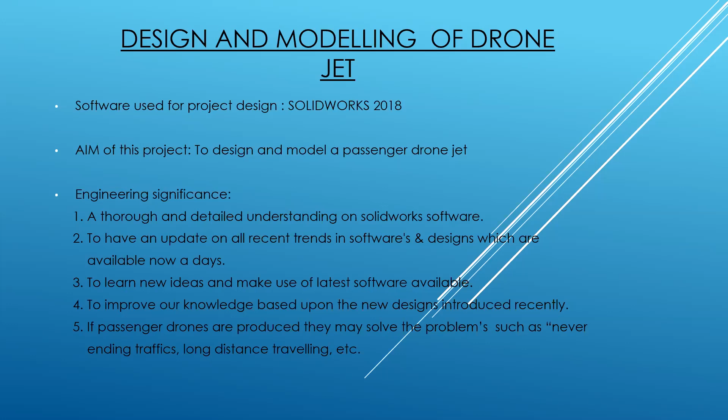Next, I took reference from Lilium company, and I've given a link here. Lilium is developing a revolutionary on-demand air taxi.

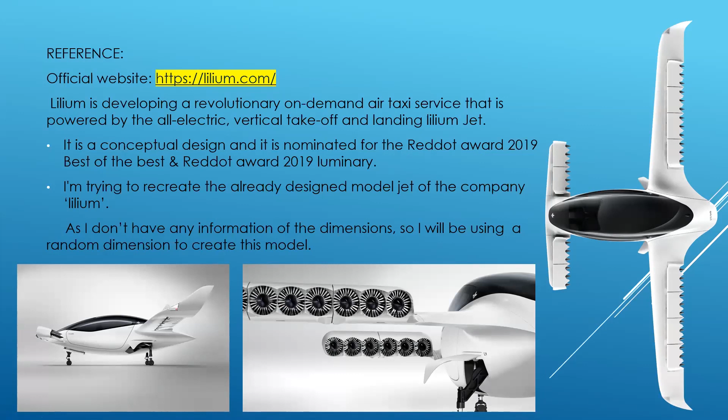We have problems anywhere in the world, like traffic on roads. So this company has introduced the idea of flying from one place to another, but it's a full electric vehicle, and this company has also received some awards like the Red Dot Award.

Introduction: it's an all-electric aircraft. Unlike a normal aircraft which has a single jet engine turbine, this one has 36 engines mounted on its flaps. So it can take a vertical takeoff, and during mid-transition it can also move forward.

It has ultra redundancy with 36 independent engines and a triple redundant flight control computer. Each engine is independent and controls itself, so if a failure happens to one engine, all the other engines can take over, making it safe.

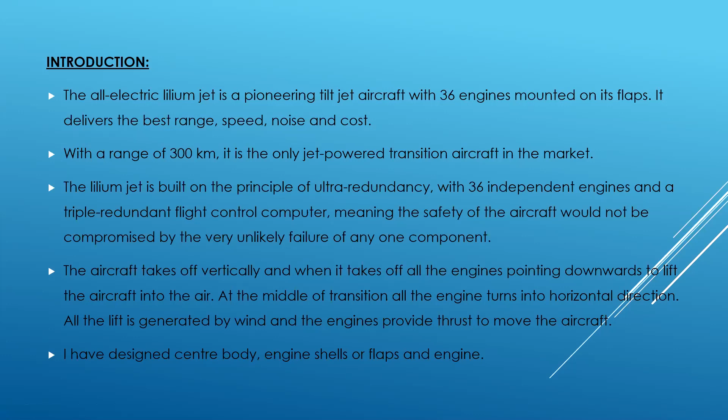So first I started the approach by making the drone center body. I started this as a surface option, creating an oval, eye-shaped profile, then closing all those using a loft.

After the loft, I tried to make curves in the shape of all the curves, because I thought I shouldn't see any sharp edges.

So I tried this, then added the wings also using loft. The front loft was much easier, but at the back of the wing I had to shape it differently, so I used lofted surfaces with guide curves, which made it much easier.

For this part here, I used surface modeling to cut this profile and build inside a bulb-like shape. After that I used the split curve option, split lines or split curves, to get the doors, exiting seats, or landing gears, etc.

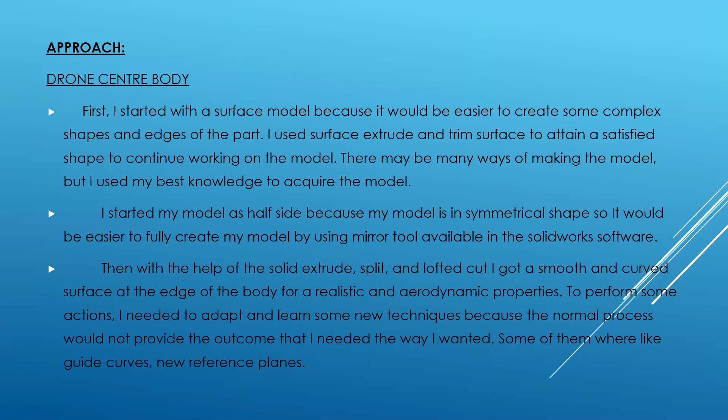I used solid extrude, split, and lofted cut mostly, and because of that I achieved these curvatures.

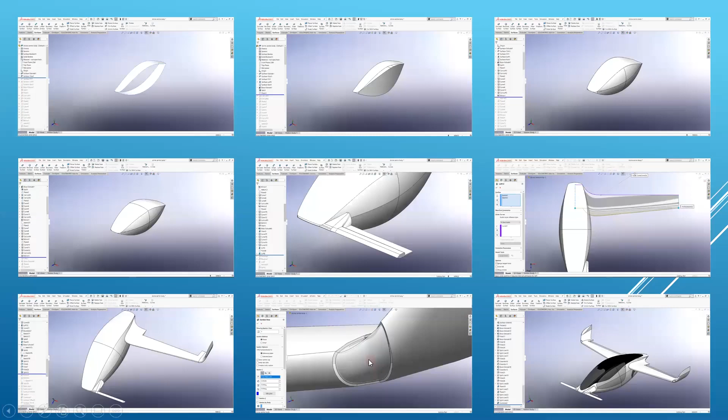Then after finishing my center body, I started doing the flaps used here. Flaps means you can change the direction of the flaps according to which direction you want to go in flight.

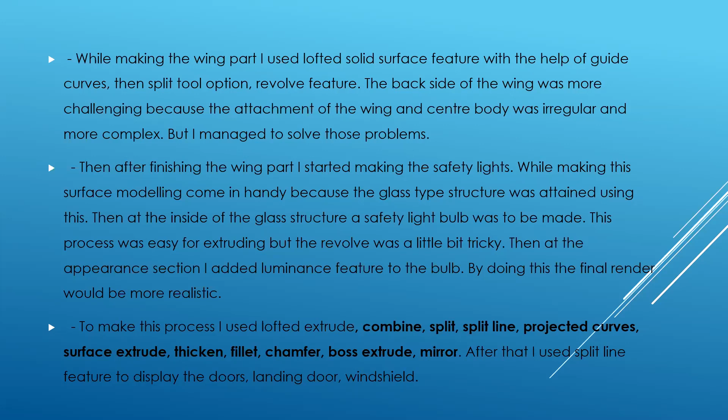After finishing the wing, I started making the flaps, like the cover for the engines, which fit onto the wings. Using surface modeling was a better idea, so I combined splits, defined projected curves, and similar techniques.

The engine shell cover is basically used to fix the propeller engines to the body of the jet engine, which is why the engine covers are used.

At the front of the jet airplane there are engine slots: six on the left and six on the right in the front, and in the back side of the wings, 12 on each side. So actually we have 36 engines all over the jet.

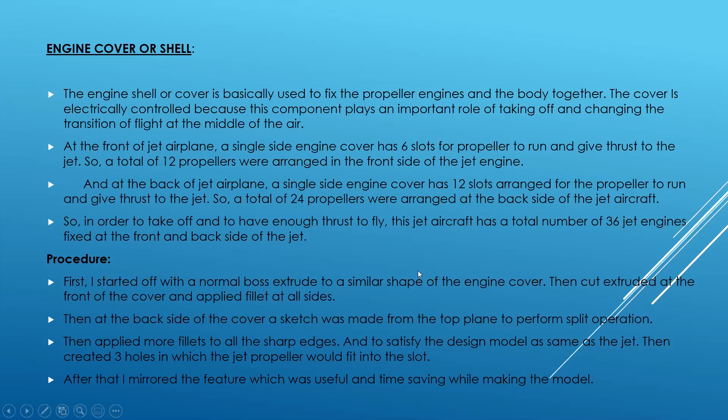The procedure: I first started with a normal boss extrude in a similar shape, then started cutting it in this curved shape for more aerodynamics.

Then I started making holes. I made a single hole and used the linear pattern option to create multiple holes.

Then at the back side, I reduced the weight by cutting it in this shape and dimension, so it would be both more modern and realistic.

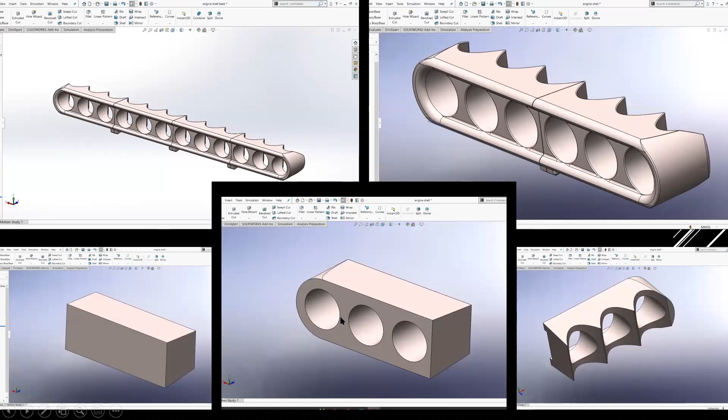All the dimensions used here are based on my own ideas, not standard ones. The inner diameter of the slot is 200 mm, which provides the power to lift the full aircraft. So then I started making the engines, the single engine.

First I made the tail, then the center body, and the dome option. Then I used the revolve boss base to make the cover for the blades, and built the blades themselves.

I made these blades by changing the sketch using loft, building different planes - one at the edge of the cover and one at the edge of this body. So I used a lofted extrude with the two sketches and was able to obtain these shapes.

Then, the engine has a capacity of carrying 4 to 5 passengers, so that six engines can give much power to lift the body as well as the passengers.

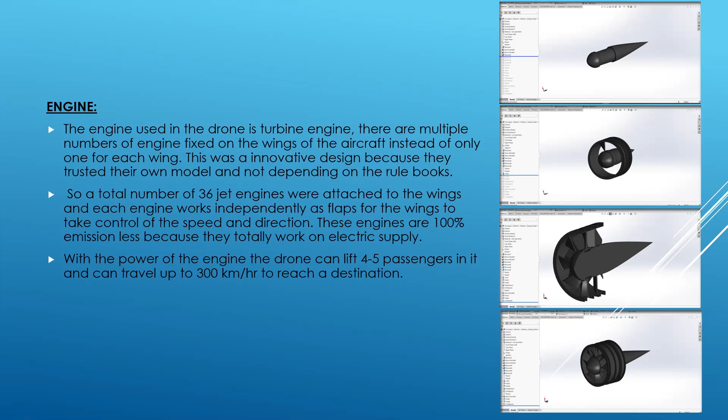So that's all. I started and finished all the parts.

Combining the other options, then I moved on to the assembly parts. The parts were totally 3 parts, but during assembly it took like 41 parts to assemble.

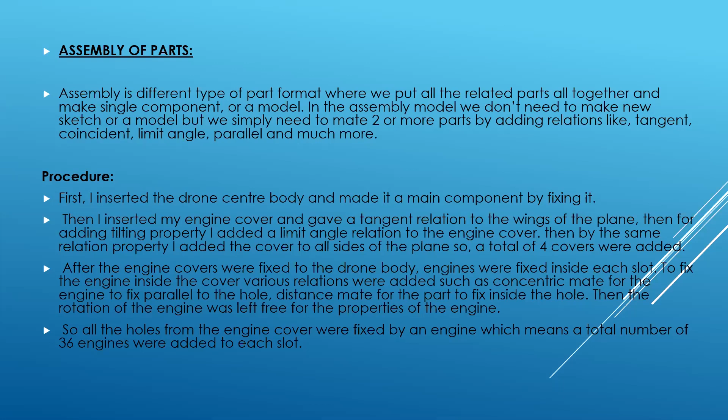Procedure: first I inserted the drone's center body. This is its center body. Then after that, I used small bars to attach the cover shells to each other.

After attaching the engine covers, I inputted more engines to each slot and gave them concentric and coincident relations so they fully attach, but still rotate like a normal engine should.

Then, after fully assembling, this is the full view.

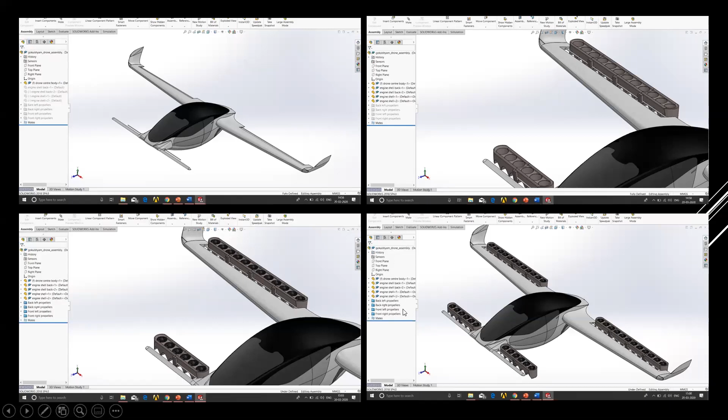The assembly tree shown on the left was so big, so I added some folders so it would be fully understandable, like the back left propellers. So with all the combine options, these are the views of the assembled parts.

This is the right side view, the top view where we can see from the top, and this is the front view. This is the angle where the jet engine takes off, and this is the angle where it moves forward.

So the covers can be changed 90 degrees from the front position to the normal vertical takeoff jet engine position, like those.

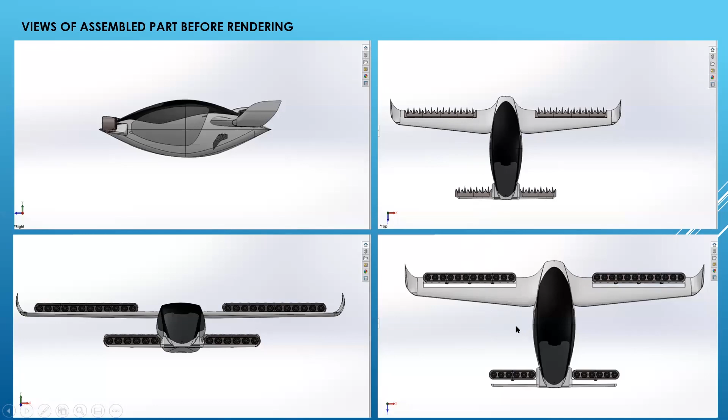Then after finishing the assembly, I started doing the rendering of the drone jet.

I used the SolidWorks Visualize software to do the rendering. Rendering is an option where we can convert our assembled parts into a photorealistic view, making it much more realistic than what we constructed in the software.

So, the procedure: first we have to open the SolidWorks software, then import the assembled parts.

In the Visualize option we can only convert the part as a photo, so we cannot change the views there like side view or right view - we have to render separately for each part.

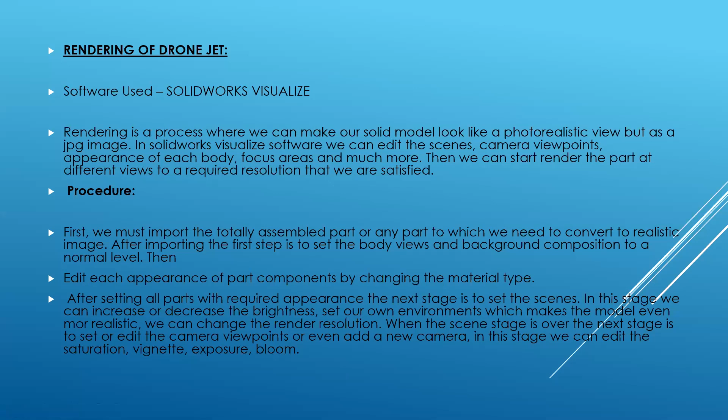In the Visualize option we can edit the appearance. We can also edit the appearance in the SolidWorks option, but for getting a realistic view we can also do the appearance here.

So for the top view I used black like the original Lilium jet option, and I changed the covers to a little darker color, like the cover doors and the landing gears.

After that we can also edit the background, choosing what background images we want to see, and we can add lights too.

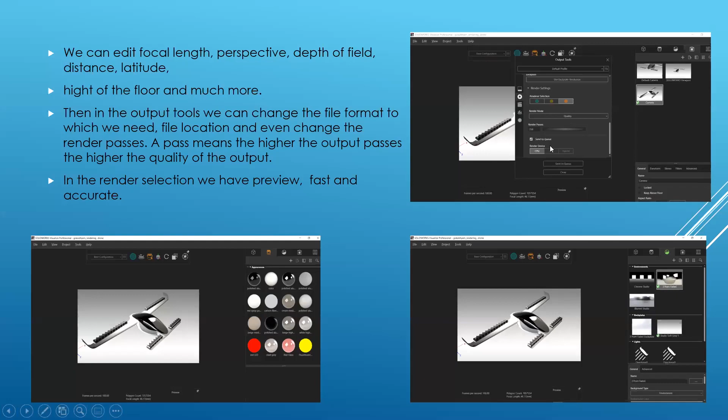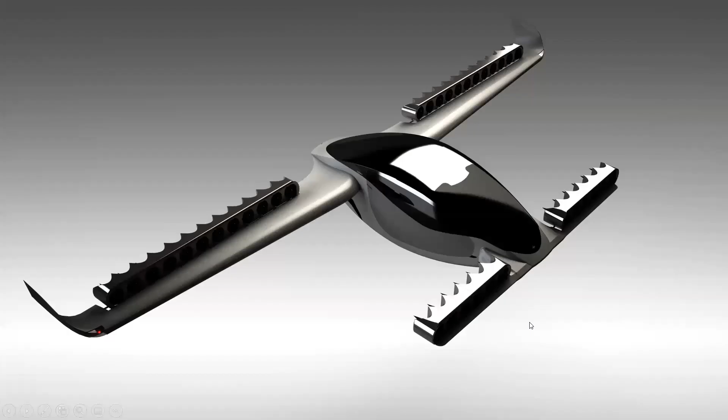This is one cool option - we can change our SolidWorks parts. So in this I used some text at the back side of the right wing that says 'Lilium G', to input my own ideas.

The G is from my Google account, same G. Also, at the end of the wings, the curvature was more challenging.

Conclusion: the design, modeling, and assembly of the passenger drone is completed using photorealistic rendering and the SolidWorks software.

For future scope, we can also add landing gear options like wheels, which I didn't use. Because I had limited time, I just finished the landing gears with this basic profile.